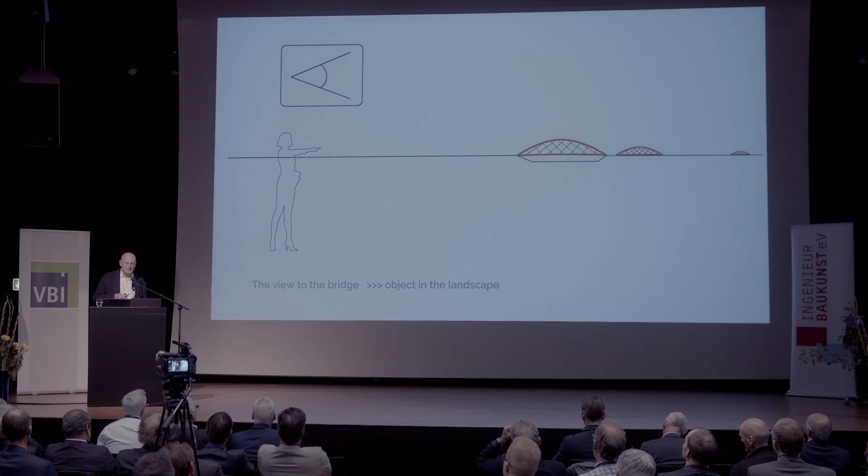We know that the objects we are designing are big objects, and you can see them in the landscape. It's very difficult to tell something about the size, about the scale of this object, because also a smaller bridge can look big, or the other way around.

One of the challenges is that your design has to work on different scales. The observer sees something in the landscape or in the city, and when you get nearer, you have another scale, and you are confronted with the materiality of the design.

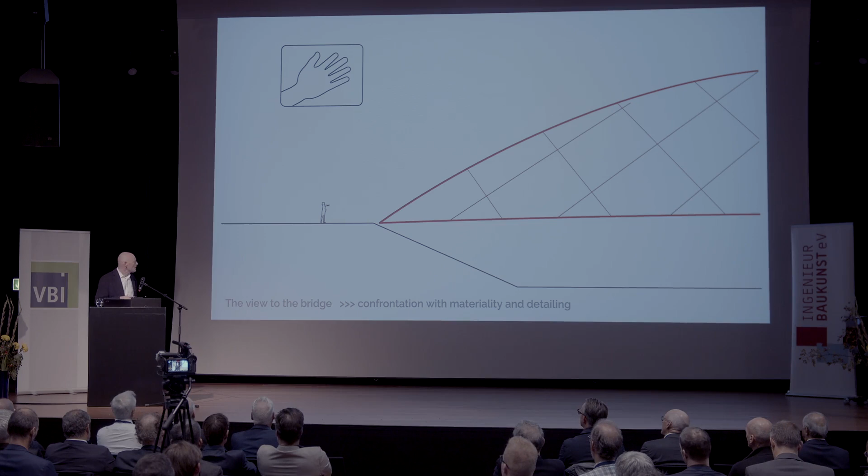And you are also confronted with the haptic - you can touch it, and it's another sort of experience. Then there's a view to the bridge, and there's a view from the bridge. This view from the bridge gives also another sort of experience of the landscape. So the bridge becomes a new point of view, a new point of experience for the user.

I was interested in other points of view, and I saw, 10 years ago, the work of Toshio Shibata, a Japanese photographer who photographed infrastructure. I was impressed by the way he looked at things that sometimes are ugly, but he found a way to look at it which is inspiring.

So I contacted him, and he had a white card - he could do what he wanted - and the result was a book. It took two years to make this book. His view on infrastructure, on the project we made, was really inspiring for me.

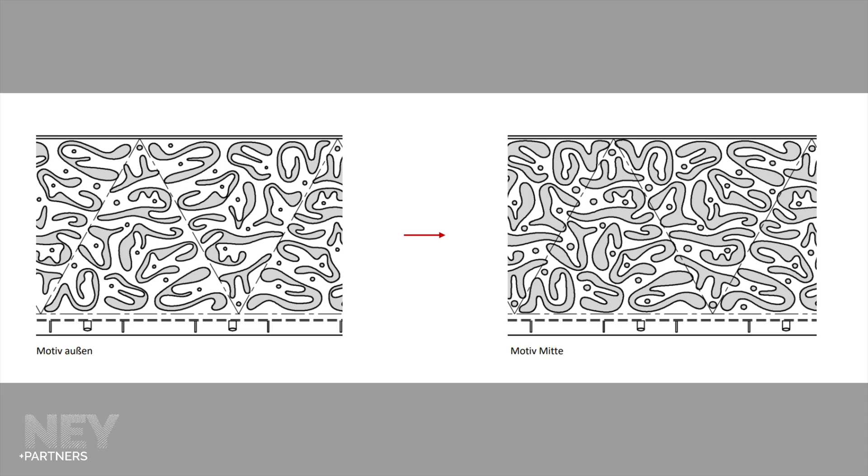It gets a little bit more complex. But where is the bridge? It comes, here is the bridge. So it's a very, very small bridge. It's in Ratingen, in Germany, and it's a Jubiläumsbrücke, for the 750 years of the city. It will be built end of this year, begin next year.

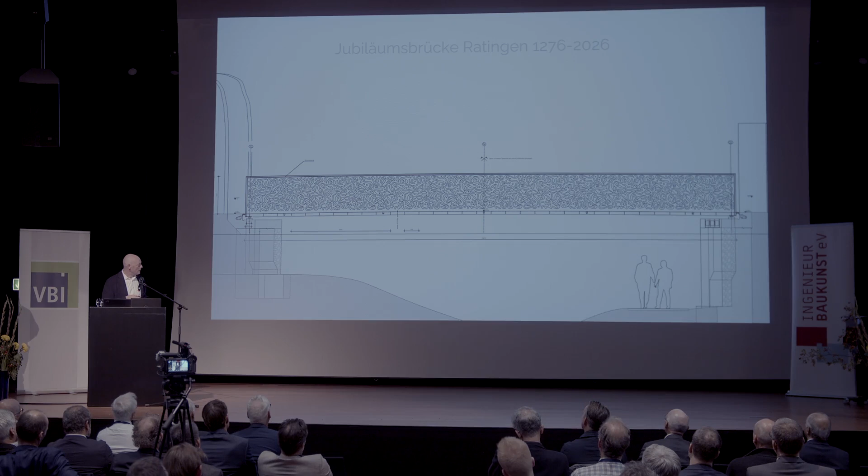What is interesting in that? Well, I think it's about user experience. I wanted to say the importance of scale. I did, in the beginning, scale matters from a structural point of view, but also from the experience point of view.

I want to show this picture. I can remember when I was a small boy, I liked to walk on the small walls, and everybody did that. So I imagine me as a small boy passing this bridge and looking at these small creatures. You don't know what it is, and every time you pass, you see something else. I think a child will think at home about this experience he had, and when he repasses, he sees something else. I like the fact that things are not determined, that it is open to interpretation.

I'm coming to south of France, in Albi. It was a painful project for us, 12 years, 2 bankruptcies of contractors, so you can imagine how difficult it was. This is a situation with UNESCO, a historical city, heritage place. You have the Pont-Vieux, the oldest bridge in use in France, from the 11th century, 1,000 years old, and there are still cars passing on it. We had to make a new connection on the other bridge, from 1866.

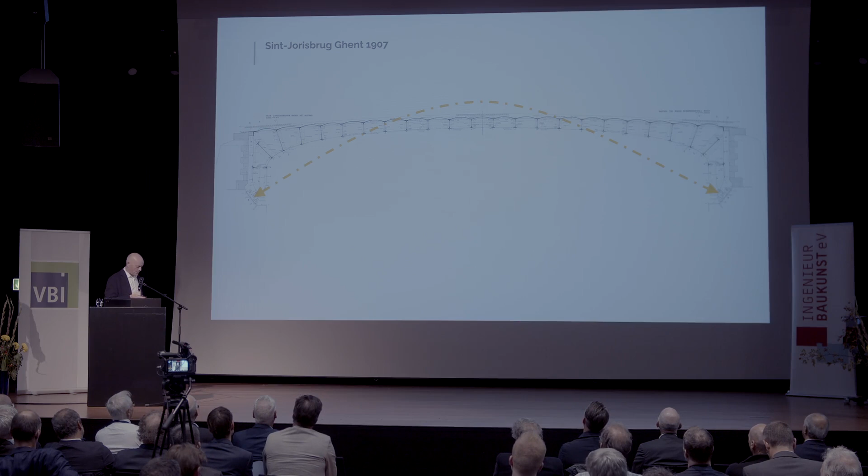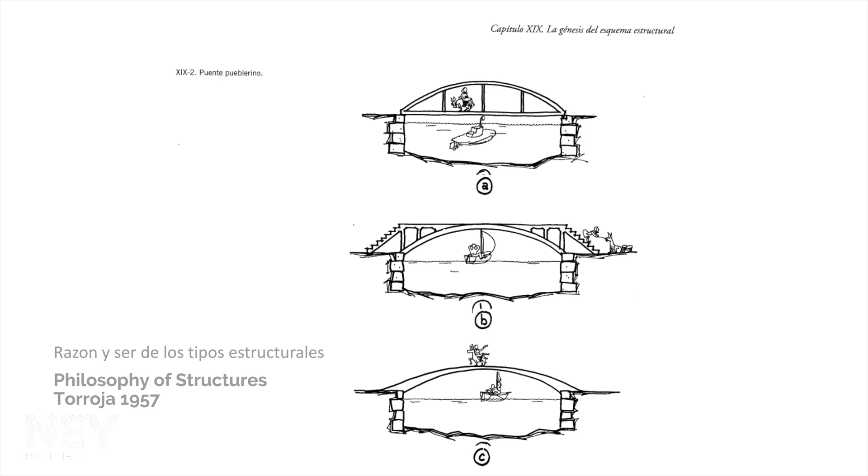Okay, elevation, you have understood. So it's an arch, which is not well drawn, but it works like an arch. So you have bending moments, but you have mainly a thrust. I had to think of this picture, this book I read when I was young, Torroja, and we are always searching to find a way through all the constraints to design something, not too high, not too low.

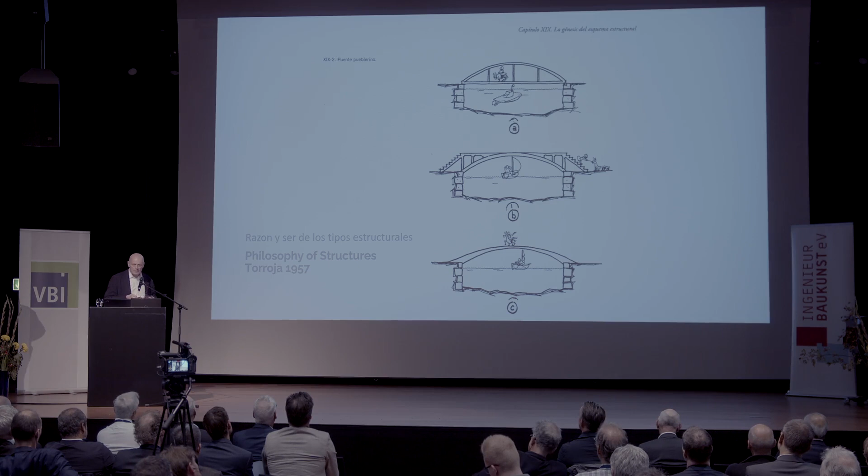And this is something we struggled with, they struggled with, we're still struggling with today. I also had to remember these three sentences of Freycinet, in French and in English. What are the three things an engineer should do?

Be able to grasp that 2 and 2 make 4. I prefer the French version. Savoir faire une règle de trois - it goes also on proportion. It's elementary mathematics, but it's also something about proportion.

Être convaincu que l'on ne peut pas monter au ciel en se tirant par les cheveux. So when you grasp your hair, if you have hair, you must be deeply sure that you cannot get into the sky, into the heavens. And so, the second one is about physics, about understanding statics.

The third one: if you design a hook, or make a nail in the wall to put your hat, it should not be too high, not too low, not too much to the right. So that's good sense. And these things, nearly 100 years later, are still, I think, correct.

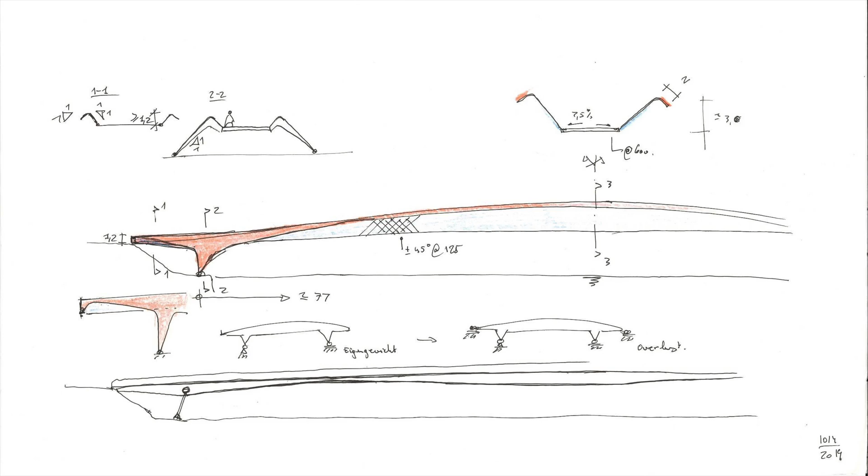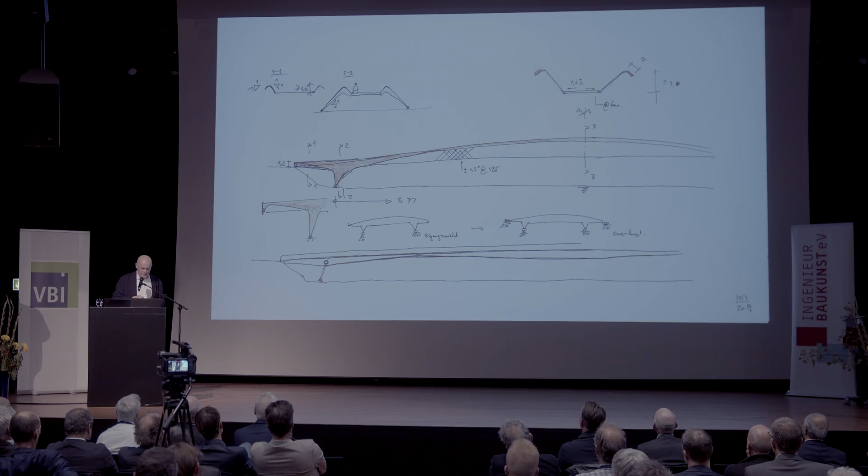Under self-weight, you are isostatic, okay? And under overlast, you are fixed here and you are taking the thrust. So these things are interesting.

I want to tell also something about the competition we did in Germany, in Stuttgart. Of course we lost, but that's normal, and that's not important. It's the same system, okay? You see here that the horizontal efforts are taken up here. So we are a little bit lighter, but still the engineers struggle to take up this effort.

Beautiful plan, 70 meters, something like that. So it's quite a big span. And three minutes, wow, I have to be quicker.

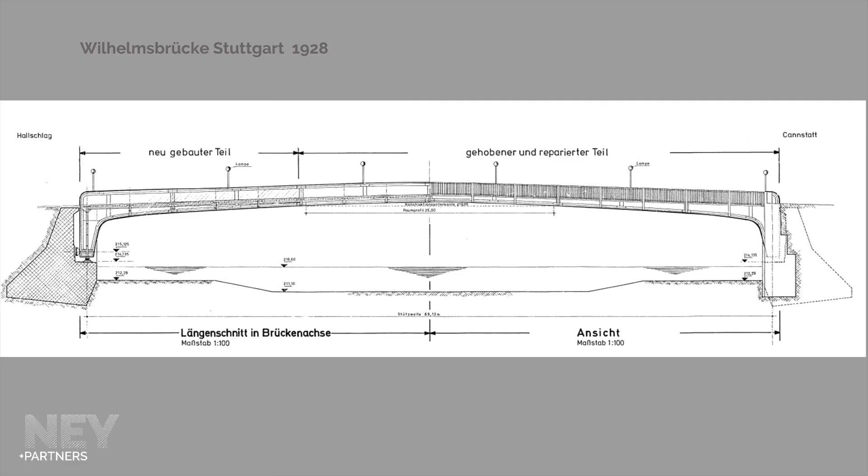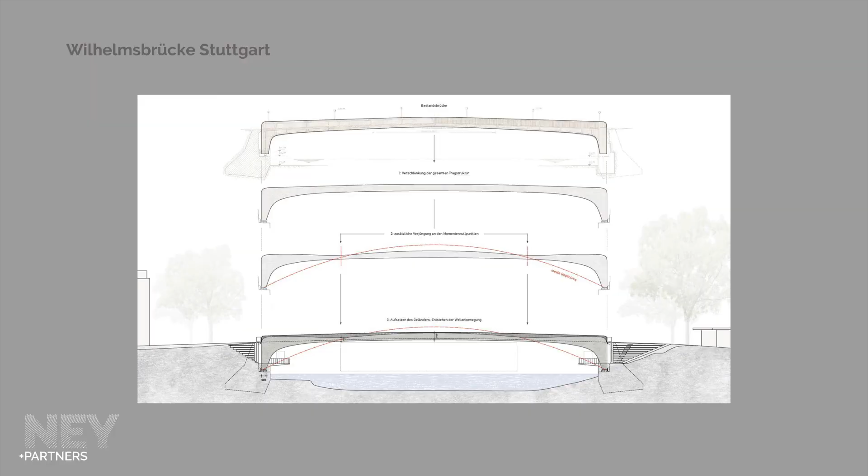Well, what I want to say is the cost lies in the foundation, because we have to take up horizontal forces. What we try to do is keep the system. So the immaterial heritage is the typology, and we try to do a modern version of this typology. But finally, a normal bridge won this competition - slender.

Well, I will go quickly. About flying bridges, I will go quickly because keeping in mind how you will construct is really something typical for bridge engineering. I want to show you a film. Why? Because I asked three artists, really artists, very conceptual, to make a film about this bridge.

Okay. How does it work now? It works.